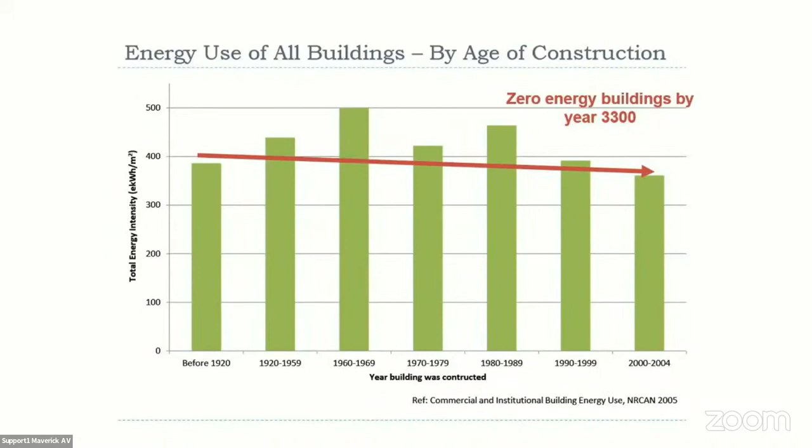Of course, we know what the issues are. Codes change with very small incremental changes, and it's just not pushing us to where we need to be. You can see this for commercial buildings, low-rise commercial buildings, but it's the same thing, 6% better, 7% better. I saw a presentation earlier where part of the requirement to access funding is doing 25% better than the National Building Code. Well, the Ontario Building Code already does that with SB 12 and the changes they go through, and that becomes the goal to meet.

But we all know the result of that. This is what we see when we build to code. You see all the 2x4s when you do thermal imaging and actually take a look at it. The only thing separating you from the outdoors is a piece of lumber. You can put fiberglass batts or any kind of batting in there, or spray foam, whatever goes between those studs, but you lose 16% just because it's lumber. The wall is 16% lumber.

So you're already losing whatever R value that you purchased to begin with. You got thermal bridging around your doors, thermal bridging around your windows. You got double pane windows, especially if you're shipping them out of Attawapiskat. They don't get warm enough for double pane windows.

And then as soon as you go to triple pane, which is typically only 5% more money to purchase the windows, the frames become a problem because the frames are thermal bridges as well, especially if you're installing the window frames with the nailing edge that everybody loves. Quick, easy, throw it in, put some nails on it, on the sheathing, and then put the siding over it.

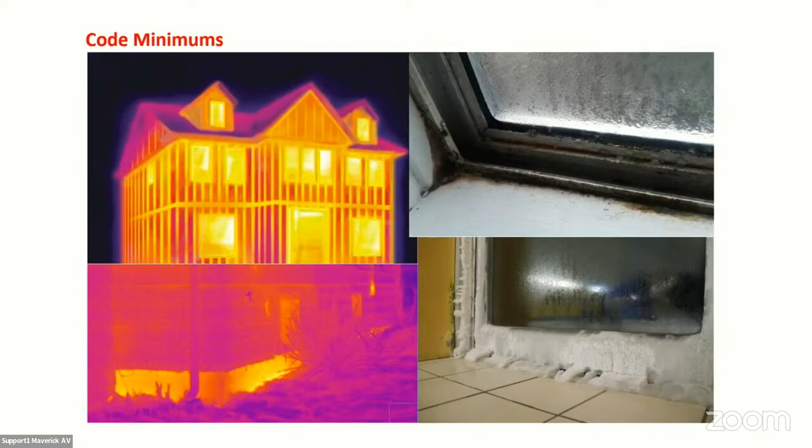But the pane of glass is then moved to the complete exterior where the siding is, and you get a huge thermal bridge around the frame. So how you do it is important.

Greenwashing is what I call it. I've heard that term before. Numerous programs on how to make your building more efficient. For commercial buildings, it was LEED. I'm LEED certified as well. I did that before I got into Passivhaus years ago. And what programs like LEED and other similar programs did is they promoted geothermal systems, they promoted solar panels, they promoted all these high-tech, very expensive solutions.

And it made everybody think that energy efficient buildings and high-end buildings are expensive, and they're always going to be expensive. And especially on reserve, where we already struggle with finances to get a little bit of money to build something that might meet building code, and then you're asking them to do more. And it's like, there's just no money for it.

In 2019, just before COVID, I was going through the last few classes of my training to be a certified Passivhaus designer. And they spoke in the class about this Passivhaus tradesperson course that was new. They're rolling it out. It was done in Vancouver. It was done in Chicago, New York City, but that was about it.

And as soon as I heard that, I tracked down some certified trainers, and I hosted the very first tradesperson course in Eastern Canada, right in Akwesasne in our community at our adult education facility. We had 14 people from my own community attend that class. It was a 4-day hands-on workshop. And I had the housing director from the neighboring community, Kahnawake, come and attend the class as well.

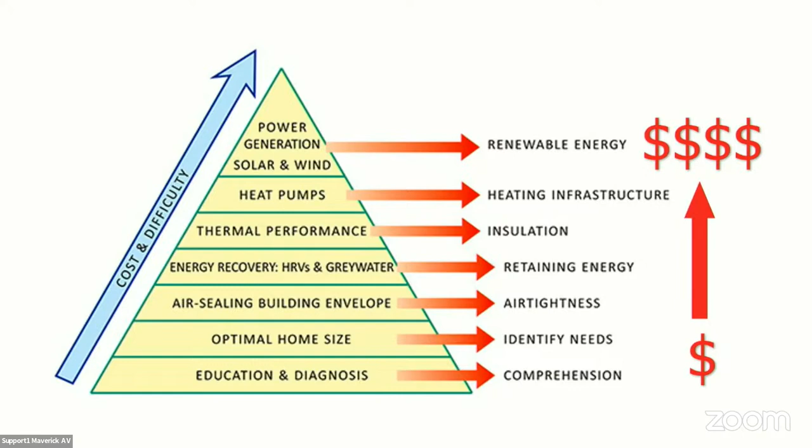How many have put in a biomass boiler or some other system, and you can't get anybody to service it? As soon as it breaks down, it's done. You can't turn it back on. You don't have anybody who's trained on how to run that system, and it's complicated. So you really got to look at what's at your disposal and work within that.

And one of the things that we're learning is it's really simple. It's really basic. You don't have to reach for those expensive technologies first. You reach for them last. So reduce your demand, reduce your dependency first, and then look at those technologies afterwards. And that's what they discovered. This is not a new concept.

This is the modern passive house. I'll get to the modern part later. But the first one was built in 1977. They studied it and studied it and studied it, and they created a Passivhaus Institute in Germany after that. And they went on to create this whole idea and develop it, review the finances behind it, review the approach behind it, everything. You can get as complicated as you want and as expensive as you want, or you can keep it simple.

And right now I'm involved in a certified passive house that's being built just outside the reserve, young builder. It's his third house that he's ever gonna build. He helped build one, working for somebody. He started his own company and built one, and now he's building a second one on his own, and it's a certified passive build. So it's not complicated. It's not something that you got to bring in a specialist.

You do need the training, and that's what he struggled with the first build that he did. He didn't have the formal training, and he kept saying he was doing passive, and I had to go meet with him and tell him, no, this is what it means to be passive. And then he understood, and I said, go get trained. So the tradesperson course that I had taught in Akwesasne in 2019, first one in Eastern Canada, because of COVID, it moved online. So I told him, just like I told the attendees in the first course, you got to get the formal training and you got to get certified.

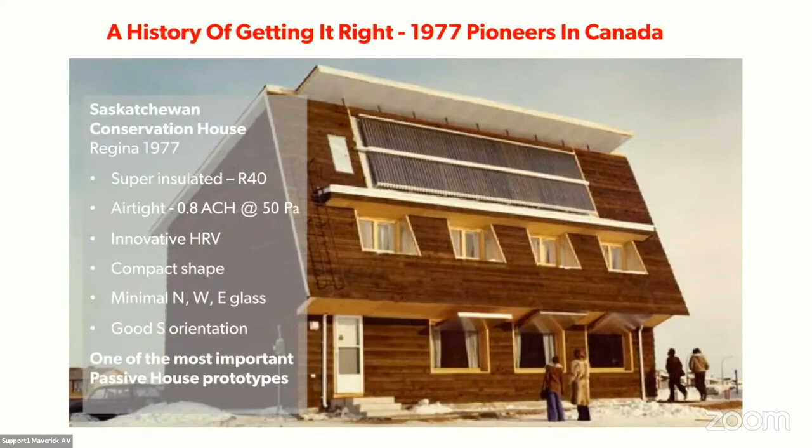Well, the attendees from my own community, after the class, we said, here's the next exam. It's only twice a year. Get the exam, get certified. And nobody got certified. This young guy off the reserve, he went and got certified. Two months later, he calls me and he says, I took the class online. I took the exam. I'm certified. He's the only one in East Ontario now.

What that training gives you is the understanding of what Passive House truly is. It's science-based. It's measurement verification. It's proven, and it's very simple. And what it does is reduce your dependency, reduce your needs for energy to begin with. Then you can start adding the other technologies if you want, if it's in your budget, or if that's what the desire is. Maybe you have to go off grid because you don't have utility services.

So it's very detailed. If you take a wall and you add more insulation, that's only a small piece of the puzzle, because now you got to address the thermal bridge around your window. The more you increase your air tightness, the more you increase your R value, the more humidity could be a problem. The more you have to pay attention to it. The more you might find thermal bridging and frosting and condensation on the window frame. So it's very important to pay attention to all those details. And that's what it comes down to. You're trading off those expensive technologies, furnace and boilers and all that stuff.

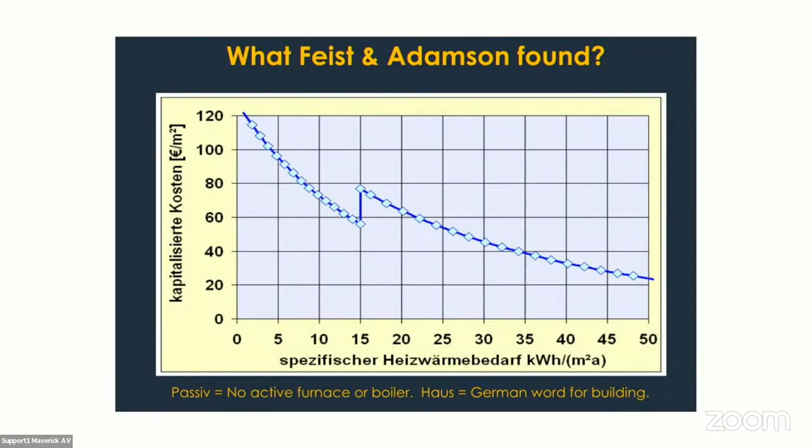The reason it works is because when you're doing an energy model, you have to look at your local climate data in order to design the R values for your building, not pick an R value at random from the building code and then stick a furnace in there to supplement where it's falling short. So it's a bit of a reverse.

When I did the presentation for the Ontario Architects Association, they asked me, a mechanical engineer, and I said, it's always too late. The architect designs the building and gives it to the mechanical engineer, and the mechanical engineer does the energy modeling to determine what size the HVAC equipment or the furnace or heating system has to be. And then you don't reiterate that back into the building envelope design, into the architect's design. That energy modeling has to shift from the mechanical engineers, where it's too late in the design, to the front. It has to be at the beginning before you design the building.

Why are we choosing R values from the building code? Because somebody decided that was a good number? Where does that number come from? And these are the questions you got to start to ask once you start to learn more. Why did we choose that number? What does it even mean? Every time a building code comes out, they change it.

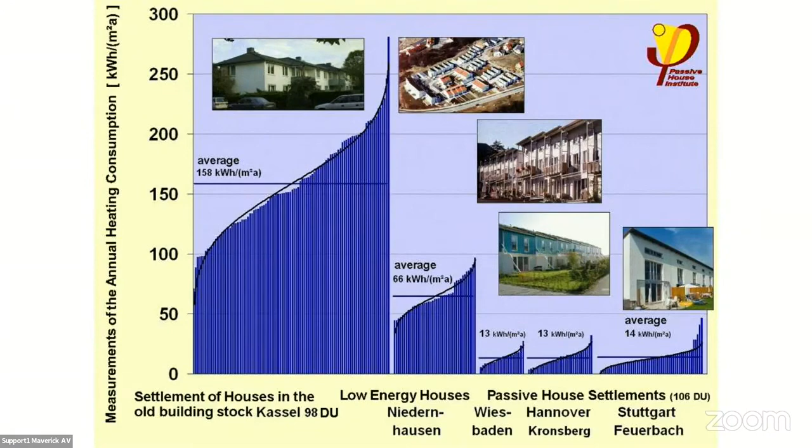By moving that insulation to the outside of your building, now that stud wall and that sheathing layer is completely on the warm side of your insulation, and there's no interruptions from the studs. So what ends up being is the healthiest, most affordable, most cost-effective, safest building that you can build, and it's climate resilient.

When I talked to my council I said, look, if we decided today that we're going to build passive buildings and we spend the money on a few designs and then give those to people, this is what you need to build, and they start building them, it's going to get cheaper. The first few are going to hurt because it's a learning curve, but it's not that much. It's like, do what you're already doing, just do it a little bit more. So once you start down that path, there's no turning back.

And we saw in Vancouver, that's what they do now. Richmond, BC, that's what they do now. They're like, we won't build anything else. They went through that growing pain and figuring things out. And they're like, okay, let's tender this project: you design build for building code minimum, you design build for passive house, and let's compare the prices. And in the beginning, passive house was 10% higher, which isn't much. 10% is your contingency fund.

10% higher. The second tender, it was even. The third tender, it was cheaper. And it's because people were learning how to do it. And it doesn't have to be complicated. It doesn't have to be expensive. And that's why you see Passivhaus taking out that whole bottom section, being cost effective. It's just approaching it a little bit different.

Pay attention to the thermal bridge. Pay attention to where the lumber is penetrating this insulation layer. Move the insulation to the outside of the lumber instead of putting it between the studs, or in addition to putting it between the studs. But as you can see, it starts with education. Diagnosis has to come from your location.

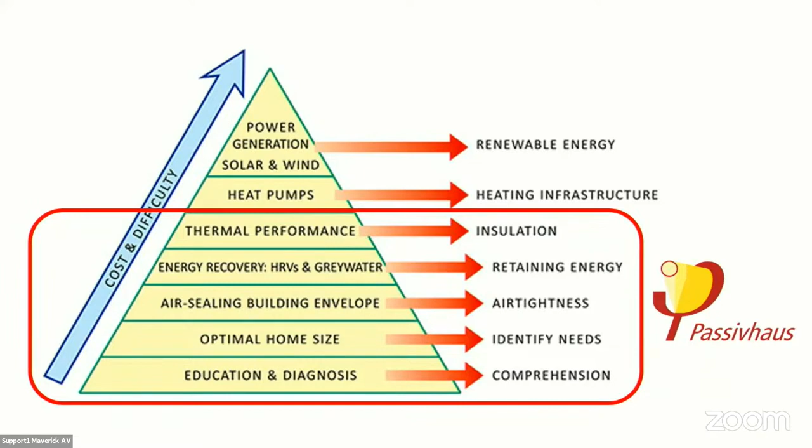And then, well, do I build a 12-inch wall or a 14-inch wall? You're probably not going to build a 13-inch wall. So we'll round it up. So at the end of the day, you're working with nominal sizes. And that's why the cost isn't really extensive or super expensive. And if you train it and approach it using the materials and the supplies that you have on hand already, whether it's ICF, lumber, or stick frame built, or whatever technology you're accustomed to, it can be modified as long as you design it from day one to incorporate the Passivhaus principles and then go from there.

So doing that energy modeling up front, not to size the furnace, but to size the walls and pick your R value. That's where you're going to get that efficiency. That's where you're going to get that reduction in dependency. The air tightness, you see one of the 5 principles, the air tightness, you can only do it once. You can't do it afterwards. There's no way to go rip into that wall and make it airtight afterwards. You got one shot to do it, and that's when you build it new.

If you're doing a renovation, how do you do it? There's that guy I showed, I can't think of his name now, and it's a shame, but the Passivhaus Institute, they went off and they really focused on new construction.

But one of the guys that was involved, he's in his 90s now, his name's Harold Orr, O-R-R. He developed the blower door test that we've all kind of seen or heard or used, the blower door test to test the leakage of your building. He invented that. And when they did that first house in '77, they developed blower door tests, and okay, this is how you test the leakage of a building.

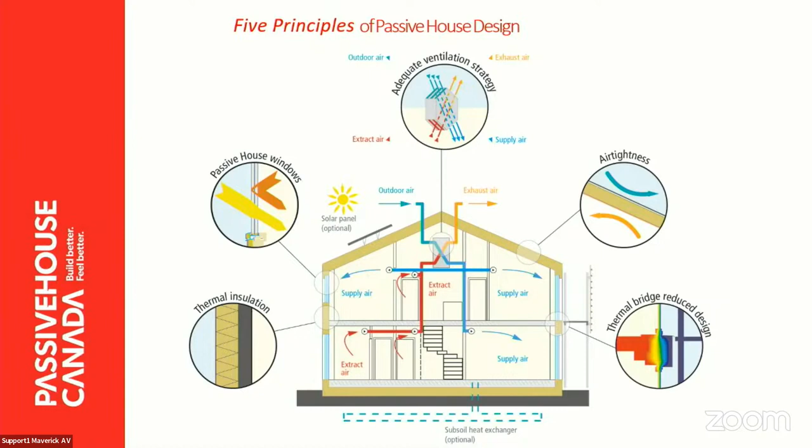If you're doing a renovation, you're spending probably the same money as building new, but you're doing it all over again on an existing building. There's still a cost benefit to doing a renovation, depending on the building; it's an individual survey that has to be done. But if you have to change your windows because they're end of life, then you might as well put passive in. I wouldn't rip out windows that have been there for 5 years and put in passive windows. You're just throwing money at the problem. So there's other things you can do.

They showed this compactness ratio from all the energy modeling, and they said, as you come down to more compact living, high-rise buildings, you've got more people, more refrigerators, more kitchens, more activity, more heat generated within the building envelope. All of a sudden, it's really easy to make it passive. They did a survey of the high-rise buildings in downtown Ottawa, and on average, based on energy consumption and exterior surface area, the average was R2 for a high-rise building. It was absurd. And then the air leakage on top of that. So it's super easy to do that.

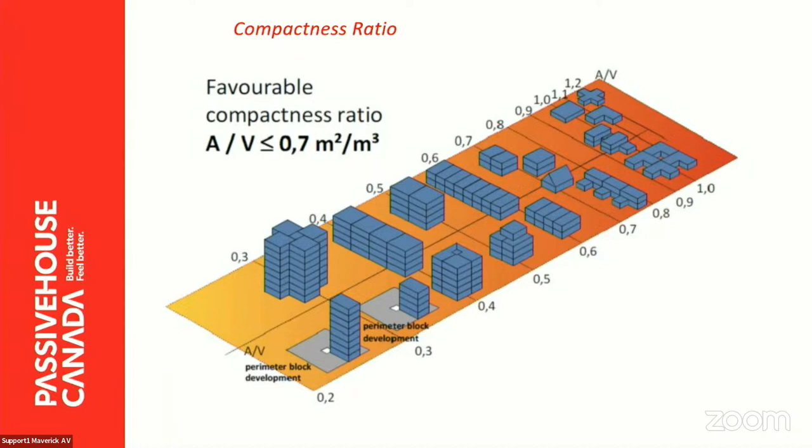When I was in training and I saw that, I was like, what the heck? That's a vertical longhouse. My ancestors lived in longhouses. They figured it out. They didn't burn wood all winter long; you would have to deforest your area. So they put 200-300 people under one bark structure, just bark, but it's warm all winter long from the body heat because everybody's in there.

There was no way you could burn wood all winter long and stay warm. You'd just burn yourself out. You can't do enough labor to do that, and then you can't harvest enough food to feed the workers. So there had to be a way. They had to figure out a way because they didn't have energy at their disposal.

They weren't spoiled with utility grids and everything else. They had to figure out a way for their local climate. And you can see the areas that utilize these types of structures. And you go to any area, any indigenous peoples, we should know better because our ancestors did it. They didn't have all this energy at their disposal, building wasteful homes. And that's the vertical longhouse. Come on, this isn't nothing.

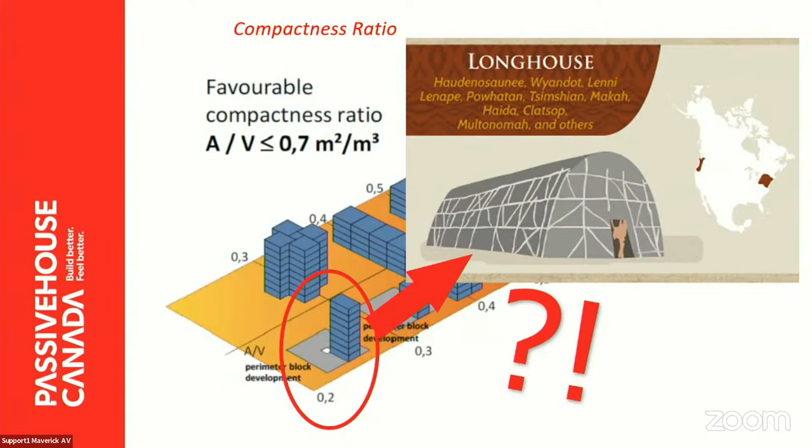So if you're going to design it right from the beginning, it doesn't really cost that much money. Sure, you could get drawings for a house for $500, but if you spend $2,000, you have no heating bill, or your heating bill's $100 a year. Well, that's kind of a no-brainer, especially if you're spending money on a furnace. What's a furnace cost these days? 20 grand with all the ductwork and everything else?

Well, put that 20 grand into the windows and doors, put it into more insulation, making it more airtight. Because that furnace is going to wear out in 15 years and you're going to have to replace it, service it. You're going to have to feed it with fuel somehow, as opposed to wall insulation that doesn't need anything. Just make it watertight. So that's what we're seeing. The knowledge, the education, the training, the experience gets behind it, and that cost goes right to zero and sometimes negative. It ends up being cheaper.

And then you save for the life of the building. I have 2 councils in my community, one on the Canadian side, one on the American side. It's craziness. I met 4 times with the council on the American side, the tribe, and they're building 19 homes or something. And I said, look, you got to do passive. You got to do passive. And they said, no, we're doing New York State Building Code. That's good enough. And after preaching to them and talking their ear off and trying to convince them, they're not looking at the true cost, because the true cost is not just the construction, it's the home ownership too. It's the operating cost. So when you factor in the operating cost, all of a sudden, it's cheaper to build passive house, without a doubt.